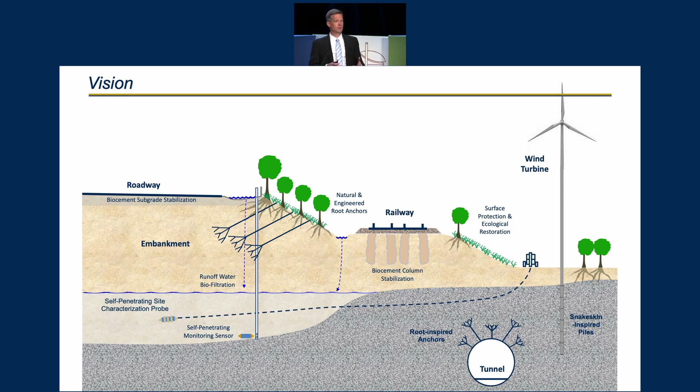First of all, just an introduction, looking at things from a very wide and broad view. You've perhaps seen schematics such as this one, or others in the literature, trying to communicate to a broad audience some of the vision we see in biomediated and bio-inspired geotechnics. Some elements are familiar in shape but perhaps different in composition. Others are familiar in their application but different in shape, indicating some of these different ideas.

But very broadly, we could say that the field of biogeotechnics is rooted in the hypothesis that studying, understanding, harnessing, translating, and applying biological processes and ideas can stimulate innovation and generate new geotechnical technologies that will produce a step change in geotechnical practice with respect to sustainability, performance, safety, and ultimately societal well-being. So we're very familiar and well-versed in providing performance and safety.

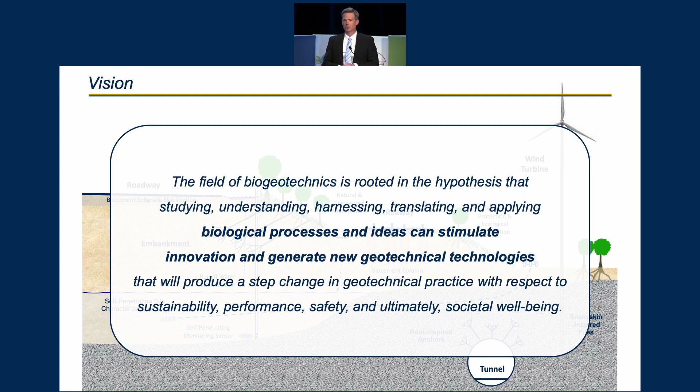We're coming along with respect to sustainability, so I just want to make a few brief comments in that regard. I believe that geotechnical engineering as a whole has a role and a significant opportunity to contribute directly to the United Nations Sustainable Development Goals. A review of these 17 objectives, I think you could draw that about 10 of them we could have direct influence on, and the other ones perhaps indirectly.

To do that, we require some systematic framework, such as life cycle sustainability assessment, that will allow us to quantitatively evaluate the sustainability of these new technologies we're developing and compare them to the business-as-usual technologies that our industry already uses. But there's tension in this, and I think the Collingridge dilemma highlights this tension adequately.

That's shown in the bottom right hand of your screen. You can see on the x-axis is project maturity, from infancy to final field implementation. On the left vertical axis is the potential for change in your design, and the right axis is the cost for that change in design. Early in project maturity, we have wide flexibility.

We have the opportunity to exchange parts to improve our design, but we actually have relatively limited knowledge of what is necessary in our idea and what is optional. Later on, the opposite is the case, in that our solution has become pretty constrained and defined, and now change costs a lot and is impactful. As a result, I believe it's important for us to be evaluating how sustainable these new ideas may be relative to current practice throughout the technology development process.

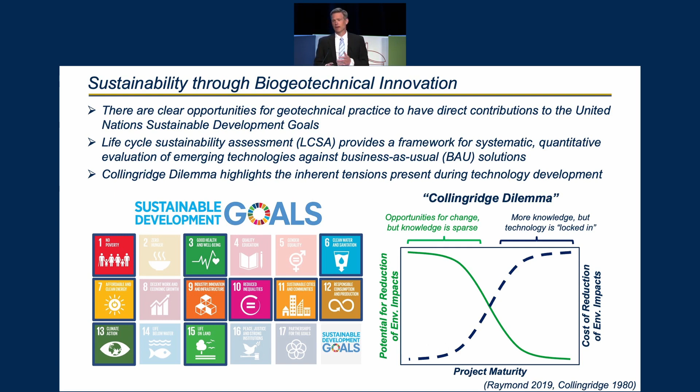More broadly, we could probably break out this whole area of biogeotechnics into two categories. The first being biomediated technologies, which has really seen an influx of activity in the last 20 years or so. I'll define it as the initiation and regulation of natural biogeochemomechanical processes to produce step changes in engineering soil properties. Our objective is to realize some type of chemical reaction, most likely in the soil matrix, mediated by biology, controlling the timing, rate, and distribution of where these reactions take place.

We want to realize our objective of mechanical changes in those properties, but we need to monitor the process along the way, and we'll discuss that. We need to push to the field, and one of these topics or potential applications is liquefaction, which we'll focus on a bit today. In that upscaling, we have challenges with respect to uniformity, permanence, and byproducts as well.

There's a whole host of these different technologies that are in the literature and are being actively pursued: biocementation, biogas, biofilms, and you'll see various combinations of these different technologies as well. People's vision is that there are a wide range of applications these could be used for, and this will be demonstrated in due time, I believe.

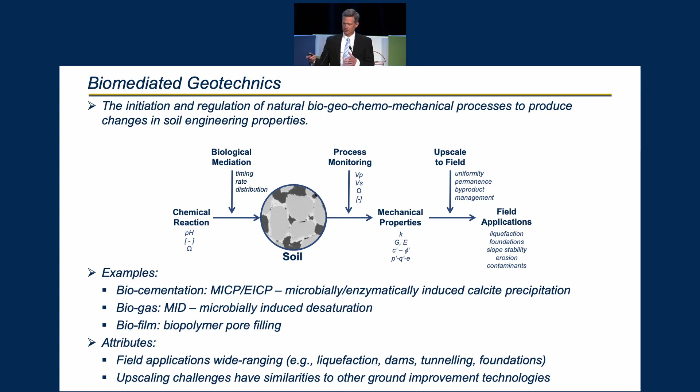But some of the upscaling challenges we're actually somewhat familiar with, both with respect to current ground improvement technologies and some of the bioremediation methods that we already use.

More recently, bio-inspired geotechnics has become much more active in the last 10 years. In this case, we're looking and studying biology and trying to abstract and translate something from a natural biological system to develop new solutions to engineering challenges.

This workflow diagram looks a bit different. Here we'll begin with a study of a biological system, integrate that with our engineering knowledge as practitioners, and try to couple those two to develop and abstract different ideas from biology that could have benefits for us as engineers.

We're going to formulate hypotheses at that point of what might be possible. We're going to end up testing those hypotheses, maturing along the way, and we're going to be then trying to upscale these to field as well, because that's our end objective, is to help improve and benefit practice. Ultimately, we will have realized in the field some new sensor or some improvement technology or something else. It's obviously an iterative procedure, these are hypotheses that need to be tested and refined to progress forward.

And there's a host of examples in this field as well. Three examples I'll highlight here: snakeskin-inspired anisotropic surfaces, or anisotropic friction; peristaltic self-reaction probes to help advance probes into the field in nonlinear directions; and different root-inspired 3D anchorage types of systems as well.

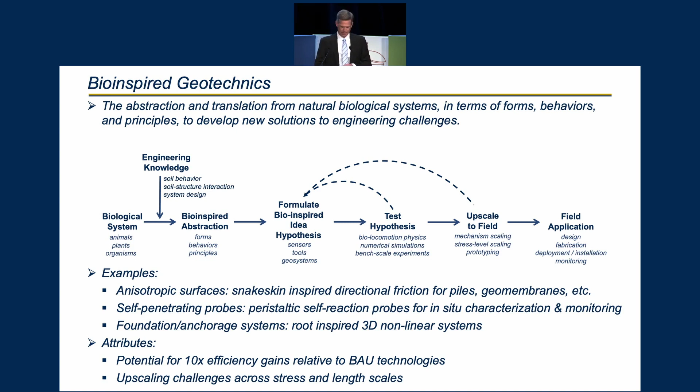Now, as we were asked this and then started preparing the scope of our paper, a review of literature would show that there have been about 25 reviews written on these two areas just in the last 3 years. So a lot of people have provided a lot of high-level overviews, some in our main journals, some in our peripheral journals.

And so we felt that that literature and those examples are out there. So our interest and our focus for this paper was instead to demonstrate and show the depth and rigor that we believe can be realized in this biogeotechnical realm also. So in doing so, we selected the MICP technology, and that's what we're going to talk through. The numbers correspond to the sections of the paper as outlined here.

And the hope in this is that we have provided enough documentation of the state of the art such that this becomes accessible and usable by people in practice and researchers who are interested in engaging in the field.

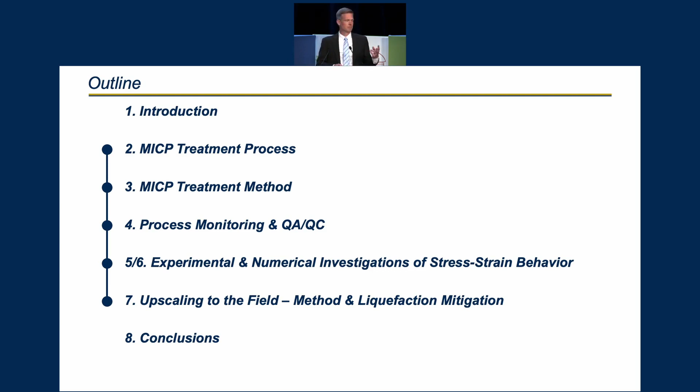So Mike Gomez is going to present sections 2, 3, and 4, which is simply what is the science, how can we engineer or control this, and how can we monitor it? And then it'll be turned back to me, and I'll walk through the types of changes we're seeing with respect to engineering properties and talk about two aspects of upscaling before drawing a few conclusions. So Mike, here you go.

Thank you, Jason, and thank you all for the opportunity to present today. So now we're going to transition to discussing the MICP treatment process, in particular talking about the fundamental science underpinning this technology.

Microbial-induced calcite precipitation is a biomediated cementation process that is enabled by microbial ureolysis in the presence of calcium. The process results from a series of reactions, the first of which is the hydrolysis of urea by ureolytic microorganisms, which form ammonia and carbonic acid.

The net result of all of these different reactions is that there is a net generation of carbonate species, and we can enable supersaturation of pore fluids with respect to calcium carbonate minerals and induce calcium carbonate precipitation both on soil particle contacts and at soil particle surfaces.

Although other processes could be used, the choice of ureolysis is quite prudent in the sense that it affords precipitation rates that can be 1 to 3 orders of magnitude greater than that which can be obtained with other redox processes.

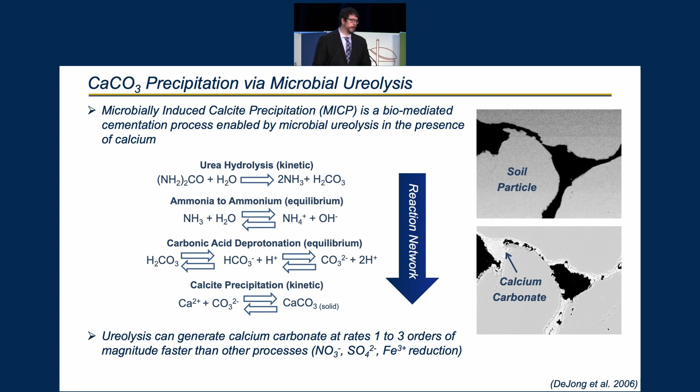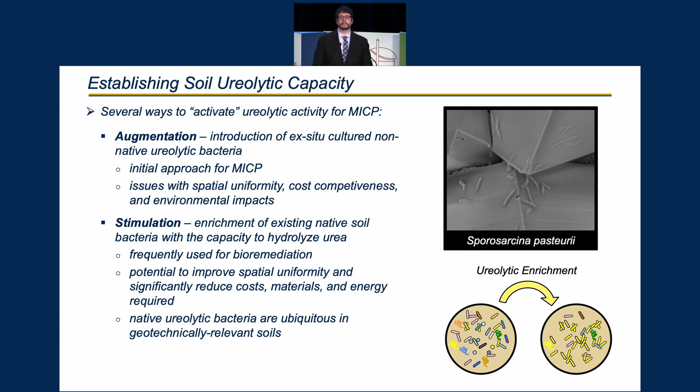This translates into significant potential for environmental benefits, as well as reductions in materials and energy required to complete this process. Furthermore, ureolytic bacteria are ubiquitous in geotechnically relevant soils. They play an important role in nitrogen cycling in natural soil systems, and so this process is highly feasible in a variety of different soil materials.

Secondly, there's also a great diversity in the range of different strains and bacterial species that are actually stimulated in these communities, indicating really that the process is robust, not dependent on a particular soil bacterium being present in a given material, and that really this can be quite successful in a variety of different environments.

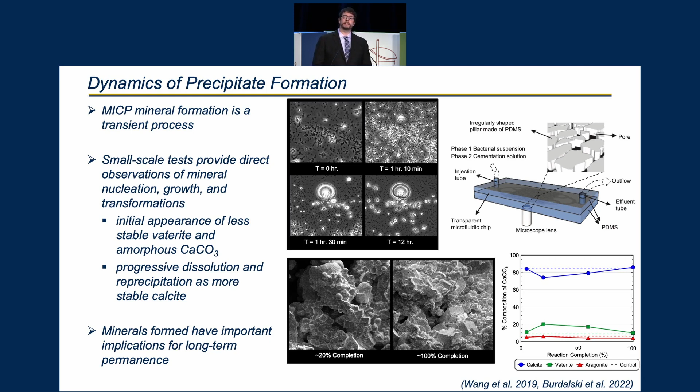This can be verified visually through the images we're seeing here, but it can also be quantitatively confirmed using X-ray diffraction, which can assess mineral presence. Of course, the minerals that are formed during these systems are going to be quite important when we start to think about the longevity of this material and how long it might exist at a particular project site.

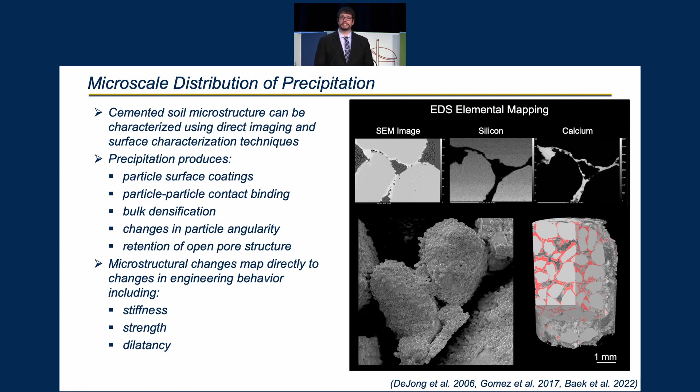Cemented soil microstructure can be characterized using a variety of direct imaging and surface characterization techniques. In particular, the precipitation that results generates particle surface coatings, particle-to-particle contact bonding, bulk densification of the soil minerals matrix through precipitation of mineral solids, and changes in particle angularity through the cladding of soil particles with additional precipitation, all while retaining the open pore structure of the original soil material. These microstructural changes map to changes in engineering behaviors, specifically differences in stiffness, strength, and volumetric tendencies or dilatancy.

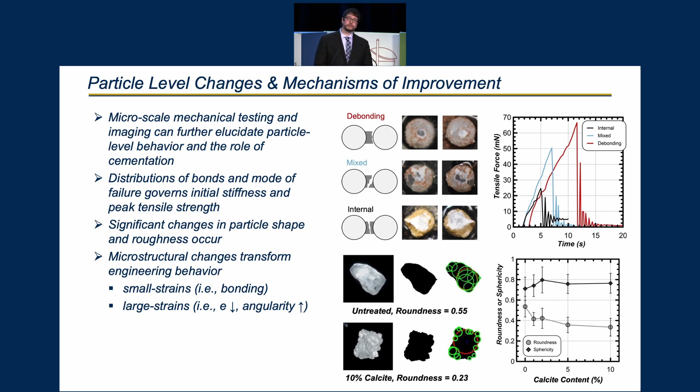Now, a key aspect of any ground improvement technology is, of course, knowing its limitations. In this sense, understanding and evaluating the permanence of biocementation is critical towards identifying favorable field applications, quantifying life cycle environmental impacts, and predicting long-term material permanence and performance.

Although not always of concern, dissolution, when favored, is a time-dependent process controlled by the solubility of the minerals present, the surrounding groundwater composition and its transport through treated soil zones, and precipitate surface area in contact with that mineral and the dissolving fluid.

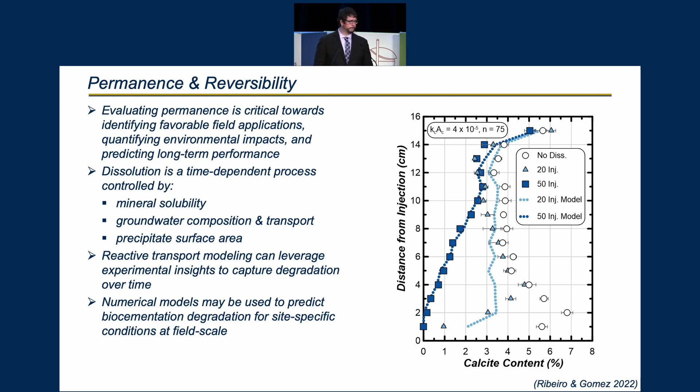So let's transition and talk a bit more about the MICP treatment process and how it can be implemented from a more practical context, including specific treatment phases and other considerations.

Biocementation is accomplished through a series of different treatment phases, the first of which is enrichment or stimulation of native indigenous ureolytic bacteria in order to develop sufficient ureolytic capacity. Once sufficient cells are present and we're able to initiate the biocementation process, cementation can proceed by supplying solutions which contain soluble calcium, allowing for progressive improvements through cementation.

As a final step, the ammonium discussed earlier is removed through the application of rinse injections, which can remove these species to levels acceptable to satisfy site requirements. Understanding these processes has resulted in a variety of different changes to the way we apply this process.

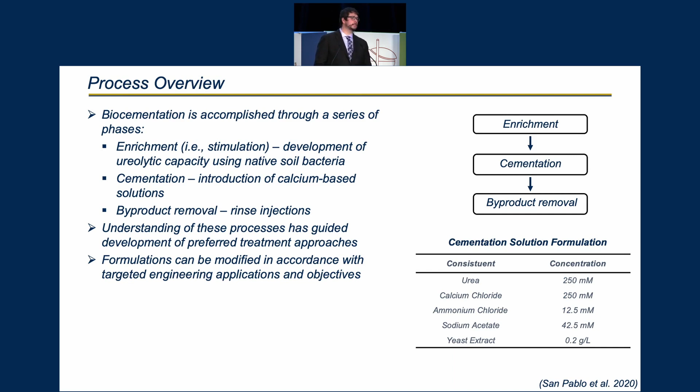Specifically, this has guided development of preferred treatment approaches. These formulations are not necessarily static, but rather we understand the process so well that we can modify treatment formulations for a given engineering performance and application that may be desired.

Microbial activity is one of those process dials. In this case, it's helping us control the release of reactive species and enable control of precipitation in a manner similar to what we can think of as a gel time for a conventional grouting technology.

Enrichment solutions can control microbial activity through targeted ureolytic cell growth, including cell densities and their magnitudes, as well as the fraction of cells which are ureolytic.

For all treatment techniques, what we're trying to target is a variety of different goals. We want reliable initiation of the process. We also want to minimize materials and energy required. And we want to control reaction speed so that ultimately we control the cementation distribution in the subsurface.

Through the optimization of these solutions, insights have been achieved which have translated into identification of really effective process dials, as well as the maximization of environmental benefits, which is the motivating factor for this technology.

For example, the data set shown here is coming from two soil column experiments during a typical treatment program. One column received a standard treatment concentration of 350 millimolar urea, while the other column received 7 times less urea.

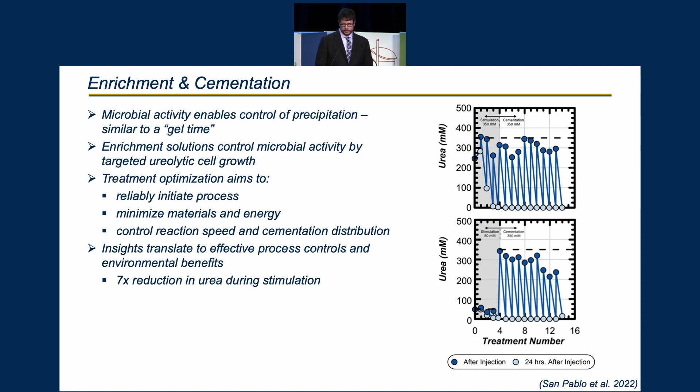Upon transitioning, we can also think about how we can regulate geochemical conditions in order to carefully control process timing and cementation spatial distribution.

As illustrated in this activity ratio diagram, we can compare solution carbonate and calcium concentrations to the solubility of calcite mineral, shown as the omega equals 1 line, or the solubility of calcite. As shown, after stimulation in this flow diagram, we see high concentrations of carbonate resulting from the hydrolysis of urea.

These high carbonate concentrations can be removed prior to starting the cementation process through flush injections, which aim to remove reactive species and prevent issues such as well clogging.

A subsequent cementation injection is then applied and pushes the system out to higher calcium activities. It is ureolysis that continues to generate carbonate hours after injection, consuming supplied calcium until near equilibrium conditions are achieved between the fluid and mineral phases, and only then does the system become ready for a subsequent treatment injection if desired.

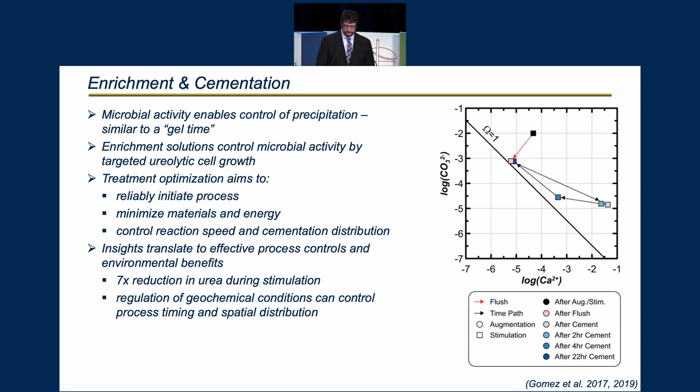Following the MICP treatment process, we can also think about the generated ammonium resulting from this process. It can be effectively removed in order to meet site-specific criteria.

Removal can be accomplished using a variety of different techniques, including advection, microbial nitrogen transformations, or other methods such as electrokinetics.

Our current approach uses advection and the application of post-treatment rinse solutions with high cation concentrations. As shown, we can track changes in aqueous ammonium exiting the column versus injected pore volume, and we can also track changes in sorbed ammonium concentrations as a function of soil column distance.

When comparing different solutions, such as the plot shown here, it's clear that supplied rinse solution cations can enhance cation exchange of sorbed ammonium concentrations and achieve effective removal from both pore fluids and soil phases.

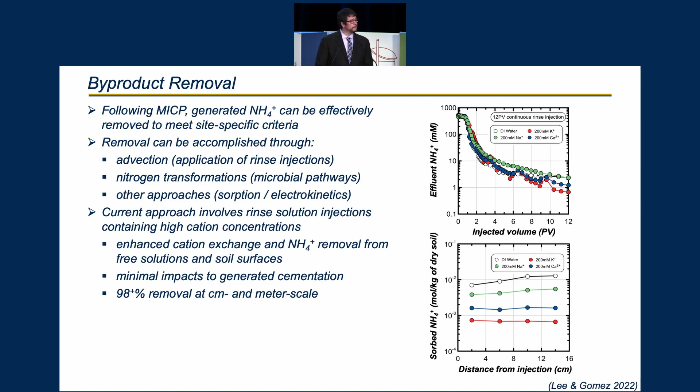The net result at the end of this is that we're able to remove approximately 98% or more of the ammonium that's generated at meter scale, with minimal impacts to the cementation overall. When considering soil compatibility, MICP has already been demonstrated in a broad range of soil materials.

Treatment effectiveness in a given soil is controlled by several different factors, the first of which is the ability to develop sufficient ureolytic capacity needed to complete this process, the ability to deliver reactants effectively throughout these subsurface regions prior to reaction, and the magnitudes and distribution of that cementation on soil particle surfaces and at contacts.

For augmentation, treatability or treatment success is largely controlled by the compatibility between bacterial cell size as well as soil pore size, which can limit cell transport, particularly once pores become exceedingly small to pass cells through. Stimulation instead may extend this range, really requiring only the transport of soluble reactant species, and we think this might make it more effective in finer materials.

When considering the breadth of studies out there, we can see clear success in a variety of different sandy and gravelly materials, with the upper bound particle size largely governed by practicality and treatment efficacy considerations, and the lower bound particle size largely governed by limitations related to low hydraulic conductivities. More recently the field has extended into challenging new materials such as tailings and combustion residuals, and this is quite promising and exciting moving forward.

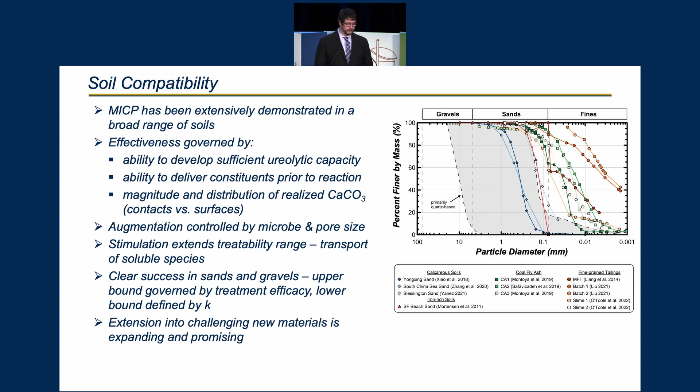Now we're going to transition and turn our attention to process monitoring techniques, which can be used to track various aspects of the process, including those related to microbiological and geochemical aspects, as well as methods we can use to demonstrate and verify improvement once we've completed it.

Characterization of microbial activity is a key component of any successful process deployment of MICP. Specifically, one aspect that can be monitored is urea degradation, an effective means by which activity of the microbes can be determined in order to determine when stimulation can end, when cementation can commence, and how reactive transport conditions can be modified to alter the spatial distribution of the cementation once precipitated in the subsurface.

This can be captured using a variety of different kinetic models over time, and ultimately can be used to provide predictive capabilities when incorporated into reactive transport models.

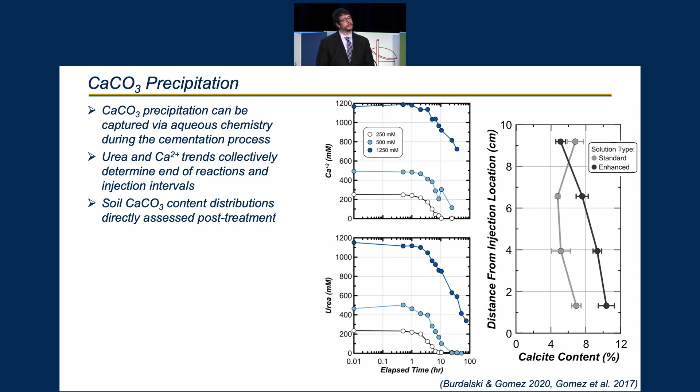Further characterization of this produced calcium carbonate can be done using things such as XRD and other methods, which suggest that under most reaction conditions, higher stability calcite is the predominant mineral phase generated during MICP.

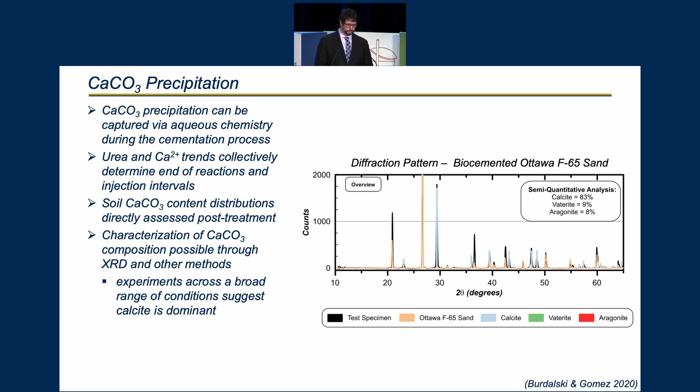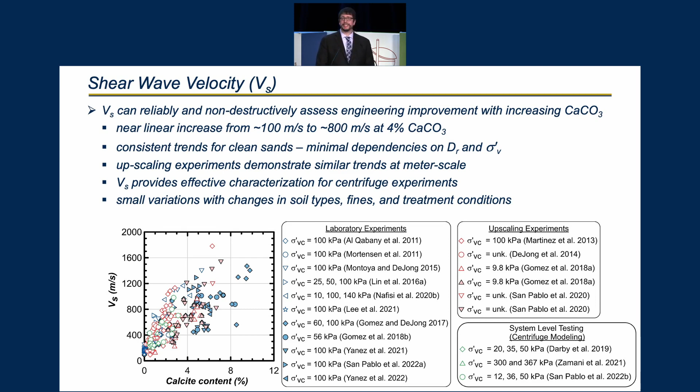When we add in some of the results from centrifuge testing, we learn that VS can provide effective characterization of cemented specimens prior to applying loading events, and it can also track the degradation of cementation during the loading process. Such trends show only small variations in soil types, fines content, and treatment conditions, being most sensitive to the variable of interest, which is cementation level.

Soil hydraulic conductivity can also provide an indirect measurement of cementation. Changes in hydraulic conductivity are, of course, going to be dependent on several different factors, including the distribution of calcite within the pore space, the magnitude of calcite, and the gradation and soil pore size distribution of the parent material.

Recent hydraulic conductivity testing on cemented sands has considered a broad range of soil particle sizes and yielded the soil structures shown here, obtained from X-ray CT scanning. These tests show that even at very large cementation contents of about 20% by mass, hydraulic conductivity is only reduced by about one order of magnitude. This is counter to earlier studies which potentially suffered from localized clogging and accordingly suggested much larger reductions.

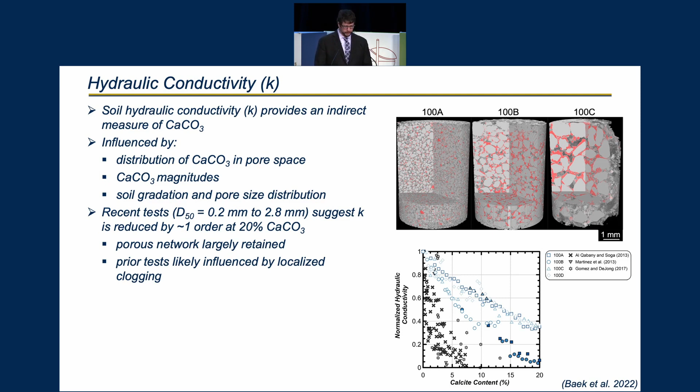We can also use a Kozeny-Carman-based model to capture this trend, where normalized conductivity is plotted versus the pore volume fraction of calcite. We see that the exponent n in this model can be related to calcite amount and relates calcite magnitude to permeability reductions. It's quite large when we look at past data sets which likely experienced clogging, varying between about 10 and 80. However, recent tests have exponents or n values near 2 to 6, in better agreement with expected trends simply resulting from densification.

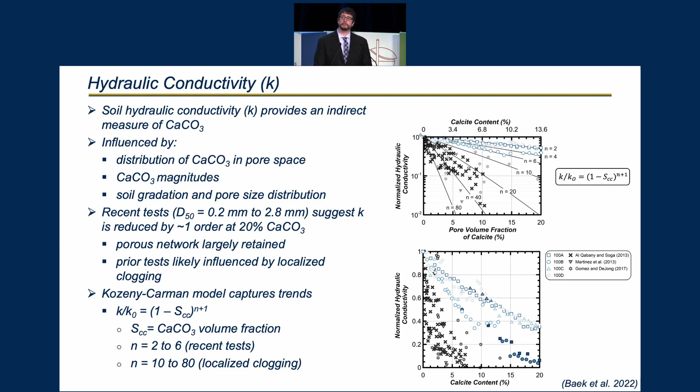Cone tip resistance provides the ability to detect post-treatment improvement through its sensitivity to changes in soil stiffness and strength. As an example, we can look at several soundings completed in materials cemented to varying levels, ranging from untreated in the gray lines to more highly cemented in the dark blue line. These soundings show an increase in tip resistance at a confining stress of about 50 kPa from something like 2.5 MPa to 22 MPa with a moderate level of cementation corresponding to a calcite content of about 4%, or a shear wave velocity increase of about 600 meters per second.

We can also see that cone tip resistance is somewhat more insensitive at light levels of cementation, with a limit of detection near 2% by mass.

When we look at results from multiple studies and plot normalized improvements in cone tip resistance versus normalized improvements in shear wave velocity, we see that these results are consistent between studies independent of confining stress, treatment variations, etc., and both metrics are effective across all these conditions. We also see there's initially a flatter slope in this trend at low calcite content, suggesting that while cone tip resistance is quite effective at understanding higher cementation levels, shear wave velocity remains a more sensitive and effective tool at very light levels of cementation.

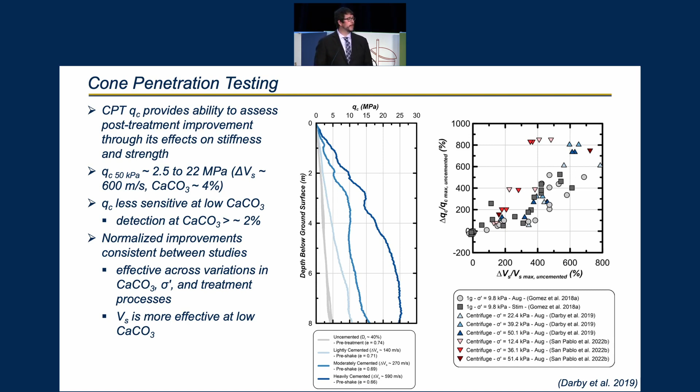The use of both shear wave velocity and cone tip resistance measurements in tandem, however, is quite powerful and can even further improve cementation detection.

Soil microstructural effects can be identified using an empirical Kg parameter, which accounts for the anticipated effects of relative density and confining stress on cone tip resistance and small strain shear stiffness, allowing cementation to be more effectively detected. The Kg parameter, in effect, considers whether or not a soil stiffness to penetration resistance ratio exceeds expectations for a given soil relative density, as expressed by a stress-normalized cone tip resistance.

When plotting shear stiffness to penetration resistance ratios using existing frameworks, we can see that sands involving different cementation levels can be effectively tracked using this Kg parameter, and that this Kg parameter increases due to added cementation. Furthermore, we see that highly biocemented sands have Kg values that exceed the 1100 value used in the original framework, most likely because of the presence of higher cementation in these experiments than those accounted for in the original database of natural cemented soil deposits.

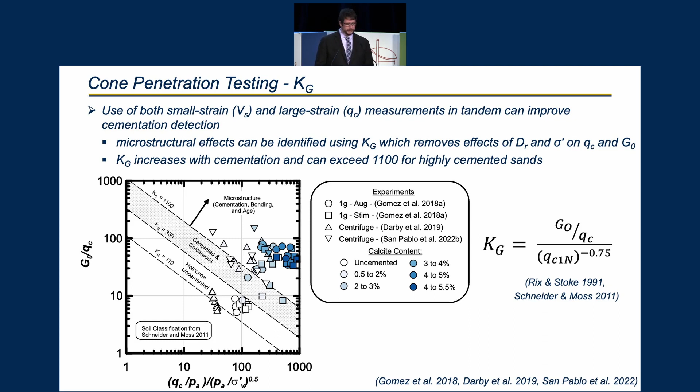I'm going to turn it back over to Jason DeJong, who will cover experimental and numerical aspects. So continuing on and now looking at the implications of this with respect to engineering behavior, we've integrated two separate sections in the paper, the experimental and the numerical part together for conciseness here. We'll begin by looking at the small strain response and particularly some resonant column tests. Recall that shear wave velocity was essentially proportional to the fraction of calcite. You're going to see us start talking about improvement level in terms of delta Vs as our target.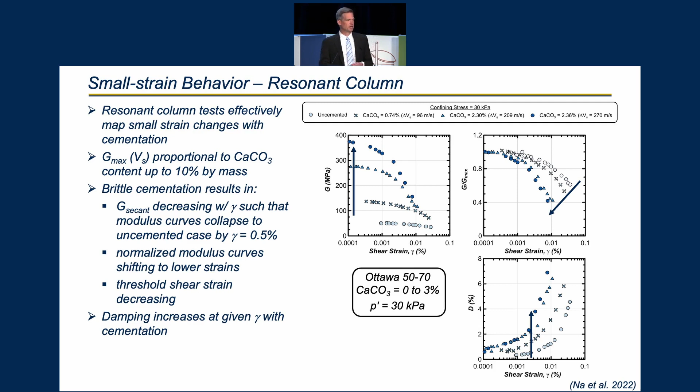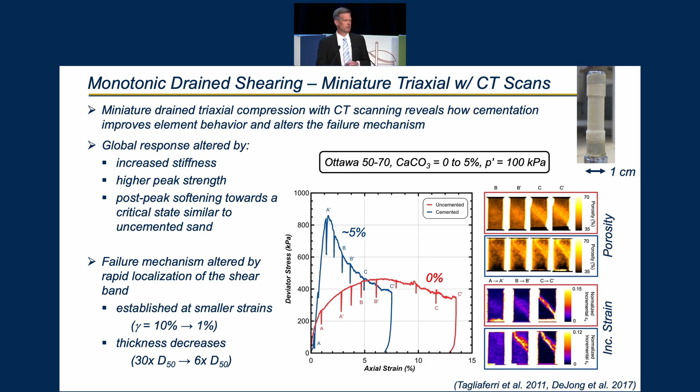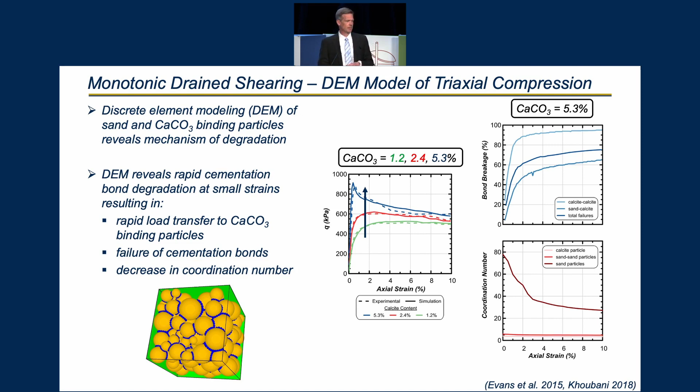As shearing continues, you can see the coordination numbers really decreasing for the sand particles because of the breakage of those cementation bonds. We can extend these results from miniature triaxial to normal size triaxial tests, which is covered in the paper, but we can also move over to DSS testing and take a look at results there.

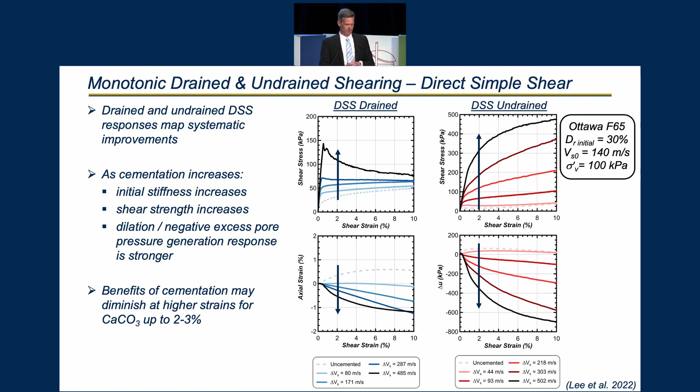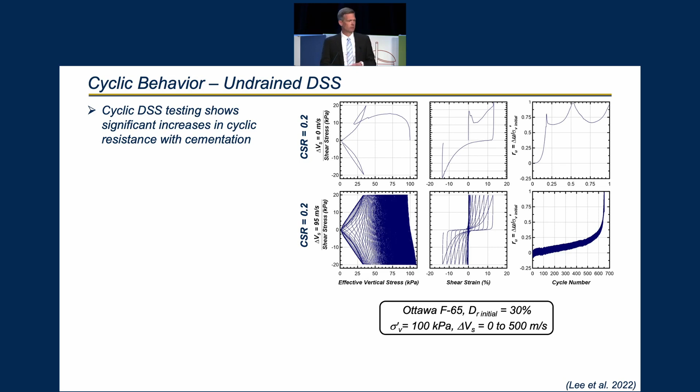Moving from monotonic towards cyclic because of the interest in dynamic response, we can see two examples shown here, both with a CSR of 0.2. The upper set of figures is for the uncemented case, the middle set is for a 100 meter per second increase, a very modest increase in cementation level. But you can see the number of cycles required to liquefy the material becomes substantially larger.

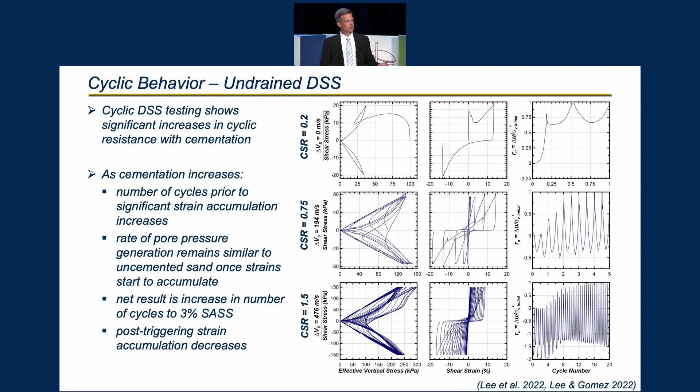Once we have started generating strains, the rate of excess pore pressure generation becomes pretty comparable to uncemented sands at the levels of cementation we're looking at. But the net result is that the number of cycles required to achieve 3% single amplitude shear strain goes up. In addition, the post-triggering strain accumulation also decreases.

In addition to the experimental work, we also have the desire to model this and to capture it in our constitutive models. There's a number of models that have been developed for cementation. I'll highlight the modification to the PM4Sand model, which was discussed this morning, where the NC term is used to highlight the ability to capture effects of cementation.

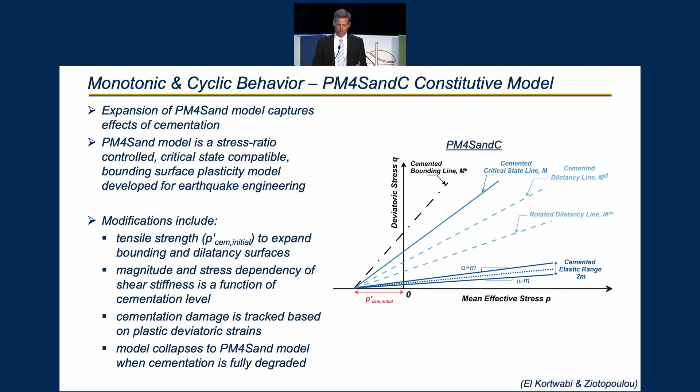That model has a few modifications to incorporate these effects. First, there's an addition of a tensile strength component that captures the cementation. In addition, the magnitude and stress dependency of the shear stiffness becomes dependent on the cementation level achieved. The cementation damage is tracked through the plastic deviatoric strains, and importantly, once the cementation has degraded, this defaults back to the uncemented model. That reflects the developer's assumption that we are dealing with cemented soils, but they are still, in fact, soil material, which can be appropriately modeled as such. We're not dealing with rock-like material yet.

So there is ongoing development of this and calibration against a much broader range of conditions, including those expected in future field trials.

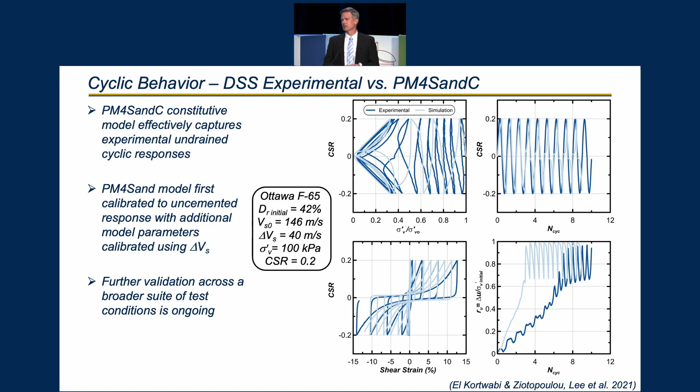Given that observed improvement at the element behavior, let's turn and take a look at what efforts have been made with respect to upscaling. We reviewed both the 30 or so different projects performed by people around the world trying to upscale this process in combination with existing design methodologies for existing ground improvement methods. We've kind of seen this flow chart fall out from the approaches people have made.

Just to walk through this briefly, the first part is a preliminary suitability evaluation, a screening stage of evaluating how suitable MICP might be, considering the soil conditions, the expected loading, and what the performance requirements might be. From there, there'll be site-specific evaluations, particularly with respect to environmental and geologic conditions, including pilot laboratory tests to ensure effectiveness of the MICP technology.

We move on to site characterization, recognizing that we'll be injecting and creating a localized flow regime for treatment. We need to have a proper 3D model with respect to the hydraulics and the geomechanics. From these results, we then try to identify our targets for how much soil improvement we need - what's our target shear wave velocity improvement, for example.

We deal with the logistics of the implementation, at this point identifying the well spacing, the establishment and the mixing and injection of the treatment solutions, et cetera. Then, very importantly, establishing our baseline conditions at the site, our strategy for how we're going to monitor improvement throughout the treatment process, and then at the end, verifying our post-treatment condition.

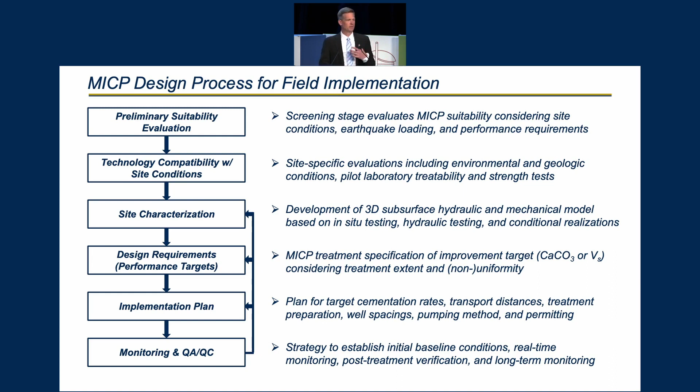On top of this, and particularly because of shear wave velocity, there's a potential to do health monitoring of MICP in the longer term if the sensing technology is established up front.

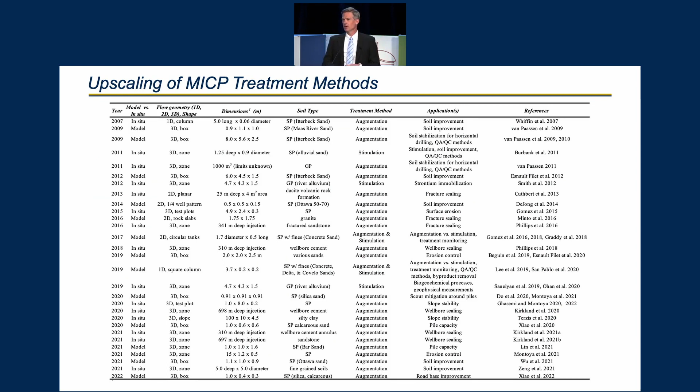So we're going to look at two different aspects of upscaling. First, I know you can't read this, but this is the list in the paper of all the different projects performed by various researchers who have tried to upscale this technology beyond 0.5 to 1 meter or so.

In summary, there's been about 29 different methods, and they have a wide range of characteristics in terms of if it's a synthetically built model, if it was performed in situ, what the flow geometry may have been, the dimensions, the volumes, the depth of treatment, the soil types treated, whether it's been augmentation or stimulation. A lot of the early work was augmentation, and now it seems to be transitioning or more balanced with respect to stimulation. And then finally, the range of applications.

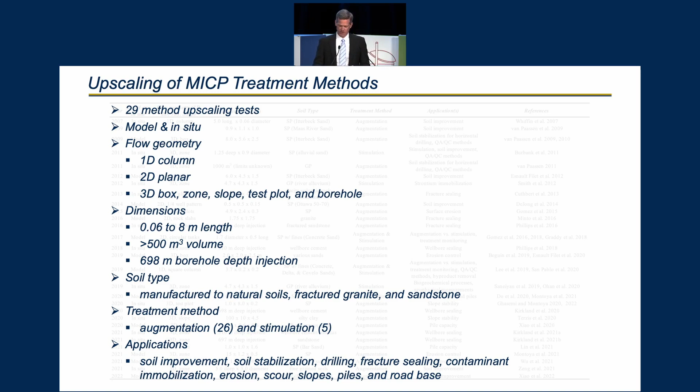But what we can take away from this and from these types of observations is we are getting to the larger scales, and we've been able to carry some of this knowledge and understanding developed at smaller scales towards the field scale. So we'll briefly give you a representative example of this, which holds the complement of all the monitoring methods as well as upscaling.

So this meter scale, or 4 meter scale, upscaling project had many different objectives, including demonstrating the efficacy of biostimulation in natural soils, controlling that treatment uniformity, optimizing the treatment formula, demonstrating the monitoring abilities, and the byproduct removal.

So you're looking at 4 meter long columns prepared with natural alluvial soils. All of the columns were subject to the same 3 steps that Mike had talked about: enrichment, cementation, and byproduct removal. You can see the time course of treatment for this project was about 25 days or so, which is maybe representative of what we expect to occur in the field.

And there's 3 different comparisons we're going to make. You can see stimulation low, which is essentially a low reaction time or a slow gel time. Stimulation high, which is a faster reaction time but using native species. And finally, injection of a relatively large volume of active bacteria at the injection front through augmentation.

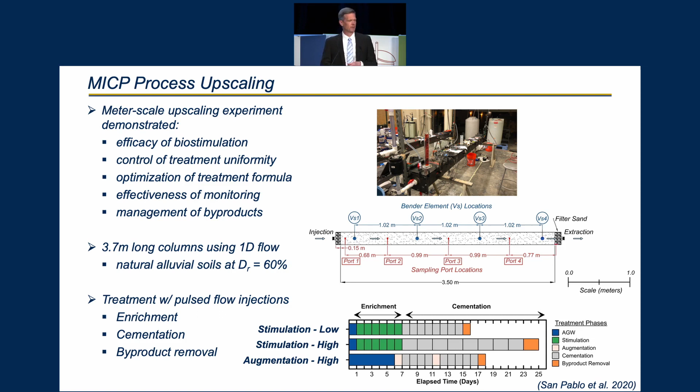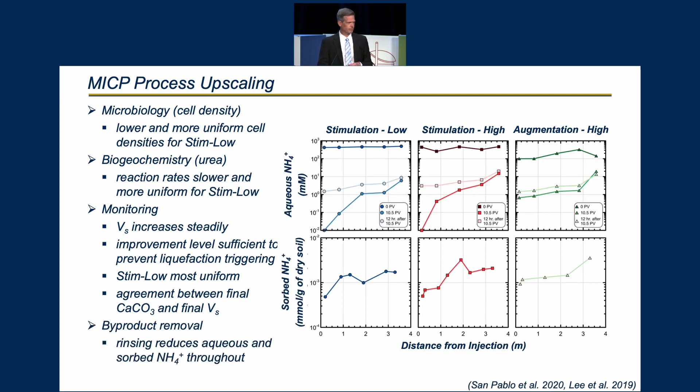The final one is byproduct removal, the final step through the treatment process, and you can see in this case systematic reductions or lowering of the contours of the ammonium, which also corresponds to reductions of the sorbed ammonium as well, to pretty low levels.

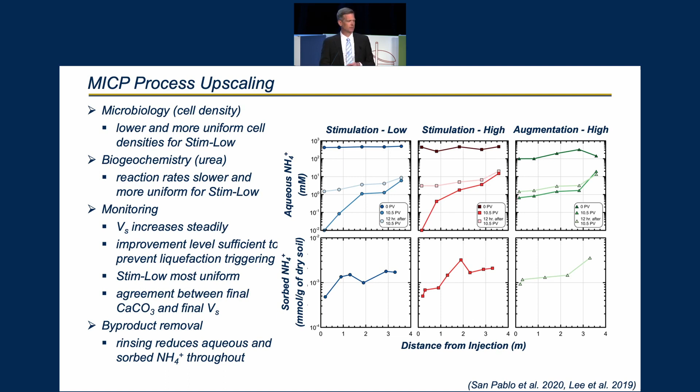The second part of the upscaling is not the treatment method, but is upscaling to ask how this might improve different geotechnical engineering systems.

In this case, we're going to look at the question of how MICP could, at the systems level, improve resistance to liquefaction triggering and also reduce the consequences if liquefaction triggering occurs.

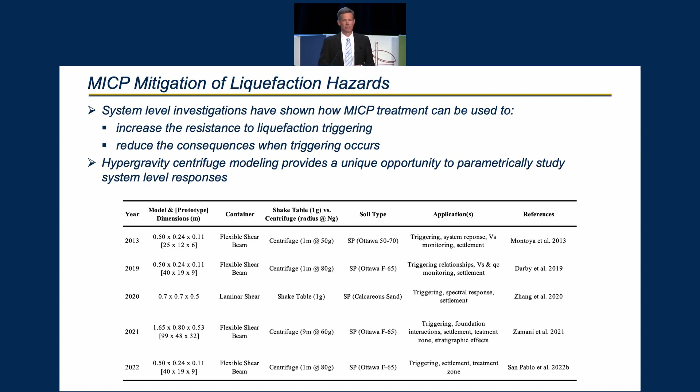There's a summary of the different plots or different projects that have been performed, but a vast majority of these have been performed using the centrifuge because of its scaling capabilities. The 1 meter centrifuge at UC Davis was used to quantify the increase in cyclic resistance to triggering, to map how cementation degrades over multiple earthquake shaking events, to track pore pressures and shear strains, and to assess the applicability of existing triggering curves.

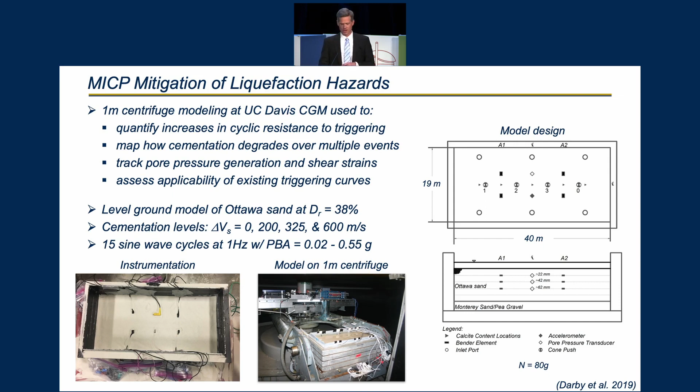A simple cross-section of the model shows a relatively simple level ground condition. Under 80 G, this simulates about a 10-meter deep, loose liquefiable deposit. There was a host of different tests performed, but we're just going to take a look at two today for simplicity: one being the uncemented case, or the existing ground conditions, and the second being for improvement to about 325 meters per second increase in shear wave velocity.

The various measurement systems allowed us to make two types of observations. The first is the discrete sensors, which allowed us to monitor the performance during the shaking event. The second is that the shear wave velocity and cone tip resistance could provide measures in between or after particular shaking events, much like we do with our case histories in the field.

This allowed us for a series of analysis and time series, and the shaking level was systematically increased. These were somewhat complex and long tests, and you can see on the horizontal axis is simply the number of shaking events for a given model.

It was quite a few, but I just want to highlight two points here. First, the uncemented characteristics are in the triangles, and the moderately cemented conditions are in the blue circles. The uncemented model liquefied with only about 0.06 G shaking, and as we would expect, without cementation, the shear wave velocity didn't really change before or after shaking, and this has been commonly observed.

On the other hand, the moderately cemented material did not liquefy until about a shake of about 0.17 G, and on top of that, we could also see from shear wave velocity that there was some damage to the cementation and it began to degrade.

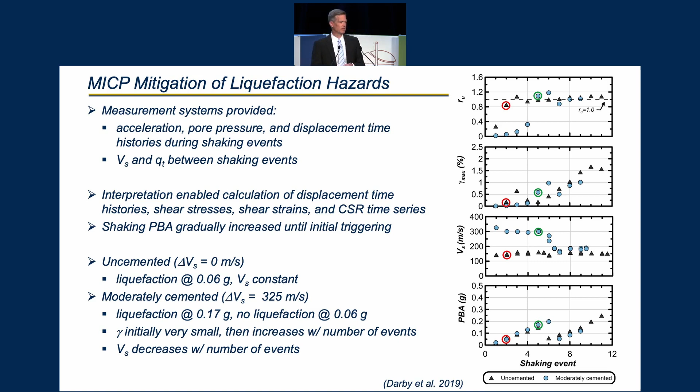So we'll just grab those two events, the 0.06 event and the 0.17 event, and compare them in the same figure, and you can see that right here. The maximum CSR felt in the upper portion of that soil was 0.15 for the uncemented case, but it was up to about 0.8 for the cemented case.

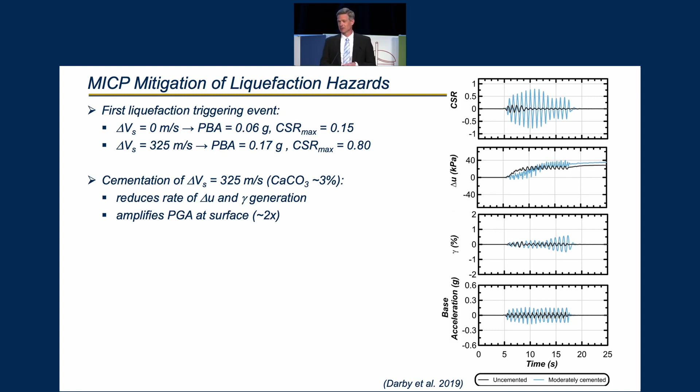Looking at the data in a little bit more detail, you can see that the cementation reduces the rate of excess pore pressure generation as well as the rate of strain generation. It also, on the other hand, does amplify the accelerations at the ground surface a bit. So that's something we'd have to consider if we provide this kind of improvement.

We also have been able to do some 1D modeling with PM4SandC in order to simulate this same response. In this case, the shear wave velocities measured in the centrifuge were used to calibrate the numerical model, and on top of that, the input base motion from the centrifuge test was the input base motion for the numerical model.

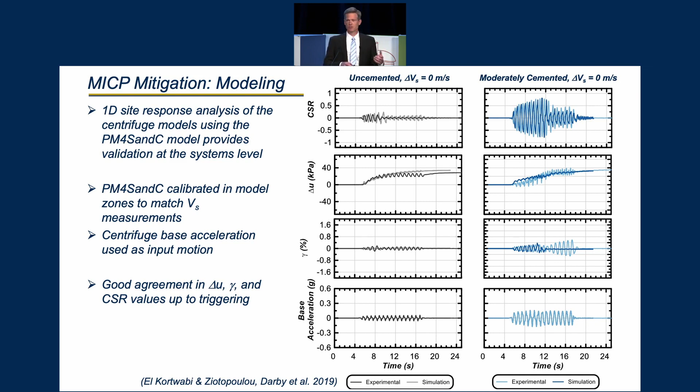Results are shown here on the left for the uncemented case, with the experimental results being in the dark line. On the right-hand side, it's actually inverted, the experimental results are in the lighter line. But in both cases, we can see that particularly up to liquefaction triggering, we can get pretty good agreement with respect to the centrifuge data as well as the numerical simulations and the combination of those.

There's one further step, and that's taking a look at cone tip resistance, because cone tip resistance many times is the deciding factor for assessing the level of ground improvement. Let's take a look at that a bit more closely. The plot you see on the left-hand side is for the uncemented case, and here, the initial profile is shown in the blue line on the left-hand side.

Over the course of about 14 shaking events, the earthquake motion systematically densified the soil, and we saw a corresponding increase in the cone tip resistance, going from about 2.5 to 6 MPa or so.

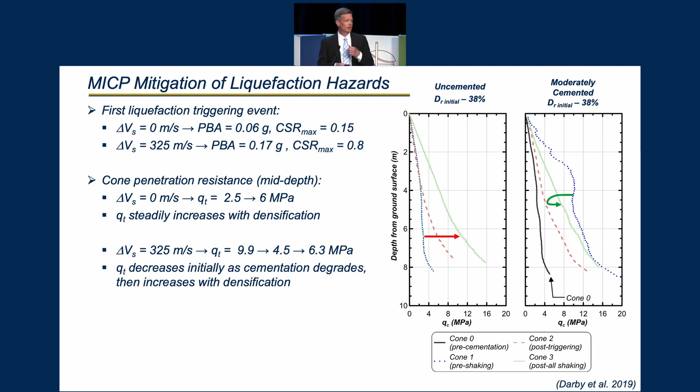On the other hand, the biocemented material had an initial cone tip resistance shown on the right-hand side, about 10 MPa. Following liquefaction, that cementation degraded somewhat, and the cone tip tracked that, decreasing a little bit initially. But then with further shaking, even as the cementation is being damaged to a certain extent, it also starts to densify, and as a result, the cone tip resistance goes up.

So collectively, we have tracking of shear wave velocity, tracking of the dynamics, and tracking of cone tip resistance, and we can stitch these together and look at them in the context of a common liquefaction triggering curve with the Boulanger and Idriss framework. The plot on the right-hand side shows that triggering curve normalized or shifted for a vertical effective stress of 35 kPa, the stress in the middle of our model. So we're using stress-normalized cone tip resistance, and we've computed equivalent cycles for the motion following Seed.

The series of gray arrows shows you essentially the walk of the moderately cemented material. Going up from the middle and the bottom upwards, those open symbols are all cases where this material and this model did not liquefy. It's only at that very large shaking event where the cone tip resistance shifts to the left a bit that you start seeing liquefaction, and you have another liquefaction event slightly above that one. Then we dropped the loading level down to very small levels and repeated the process.

But in total, if you collect that information with that from the heavily cemented model and a lightly cemented model, the two other data sets shown here, you can observe there is a clear persistent benefit from the biocementation with respect to liquefaction triggering. That's encouraging at the systems level, being able to demonstrate what that improvement can be.

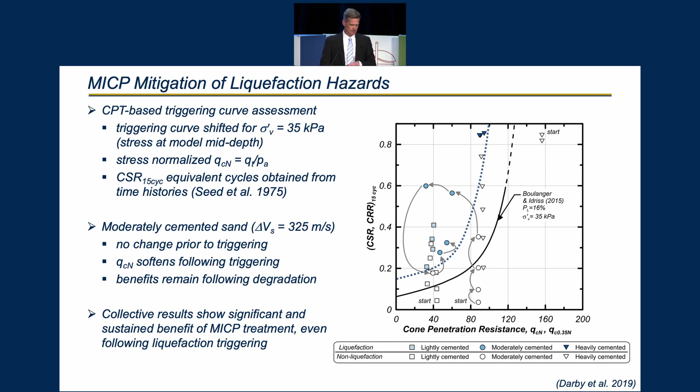So let me wrap up and try to tie together the breadth of what we just walked through in the last hour or so and draw a few conclusions. First, I hope you've seen and come to appreciate that bio-inspired and bio-mediated processes, as exemplified by our deep dive into MICP, can present unique opportunities to develop new technologies that hopefully can lead to step changes in our practice. We have developed a pretty robust understanding of the underlying biogeochemical processes, and these are effective and can be applied to a range of different materials.

This allows for optimization and control of the cementation. Monitoring is key, and our ability to monitor the microbiological, geochemical, and mechanical changes in real time and also at the end are really important for tracking progress and also to support the parallel modeling. We've realized significant improvements in engineering behavior across the host of different parameters and attributes that we've talked through.

We've seen the benefit of numerical simulations, discrete element modeling, revealing some of the mechanisms of failure, and continuum models, constitutive models with continuum modeling, allowing us to start modeling this more and more at a systems level, hopefully supporting us as we go to the field.

We've looked at upscaling of the treatment methodology itself, and while we have some ways to go, you can see that we are gaining control of treatment uniformity, optimization, minimizing material use, being able to monitor it, and manage the byproducts reasonably.